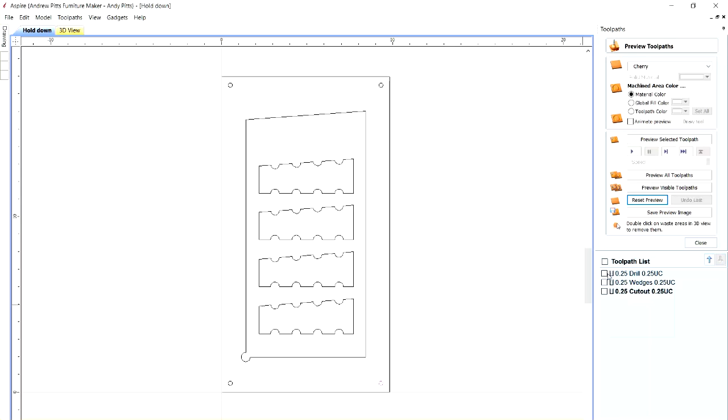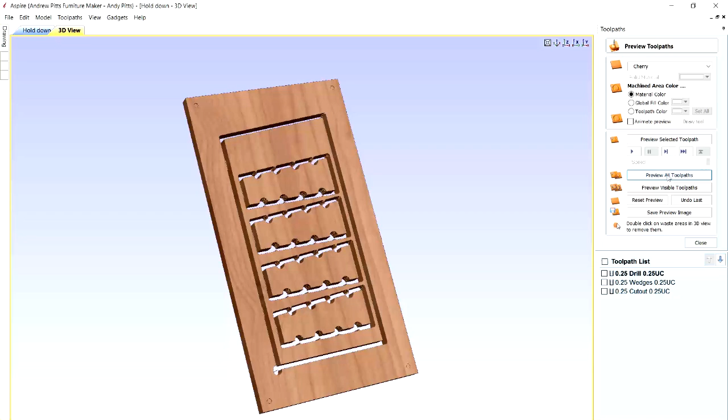So I made some little circles here for hold down screw locations and did a drill tool path for that. And you can just see the little dimples there. That's where I drill the holes for the hold downs. And then just did profile tool paths for the cutout and the wedges. And so if I come over here to the 3D view, we'll go ahead and preview all those, and bingo, there you are. You can see they're held in with little tabs. Just got to break those tabs, clean that up with a file or some sanding, and you got your form.

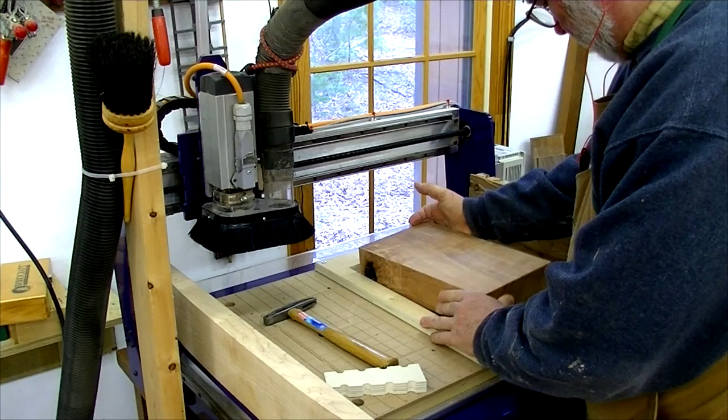Now let's get into how I made the model for the dish itself. I started out with a job size of 7 inches by 12. I found I needed to make it a little bit narrower than 7 inches because of my wedge jig, so it would fit in there nice and easy. 2.5 inches thick, so it's a pretty good block of wood. I used the lower left-hand corner for the XY datum position. And I'm using a very high modeling resolution to get the most detail I can.

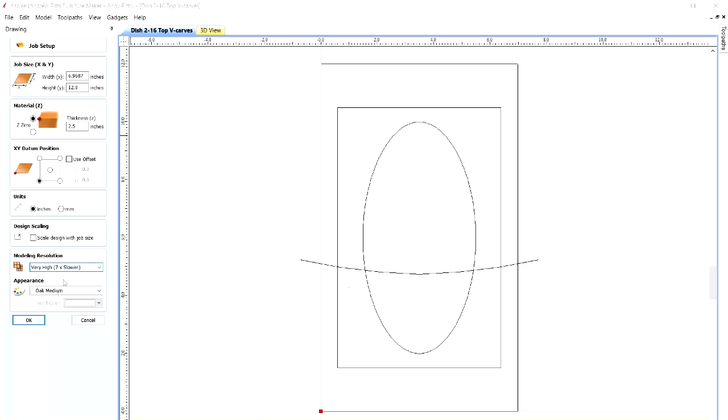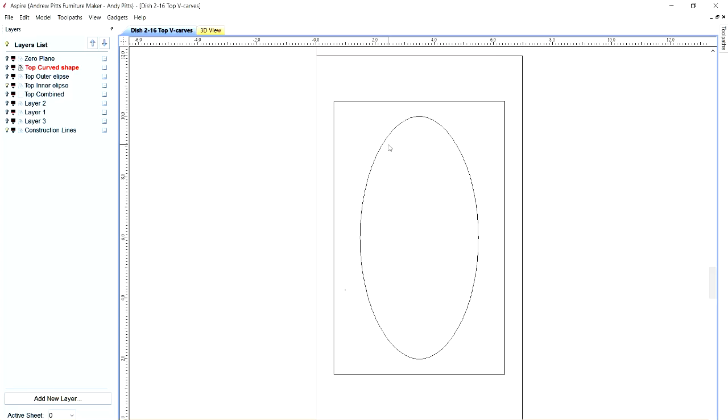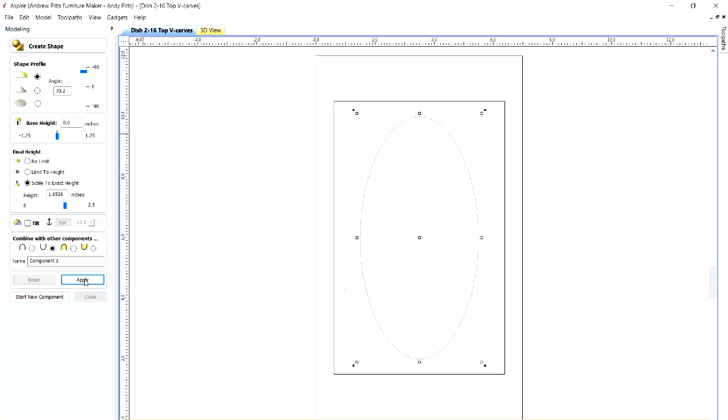I have to have an inner part of the dish that goes deep. And then I have to have outer vectors that show the little lip around the outside. And I drew that about the size I wanted. And then went into the modeling tab, selected that, and went up to my create shapes. I knew I'd want to subtract this shape from the piece, and I knew that the height would be somewhere around 1 5/8 inches or so, and a pretty steep angle on the side, and went ahead and hit apply and looked to see what I ended up with, and there you can see a shape like that. It's pretty much what we wanted.

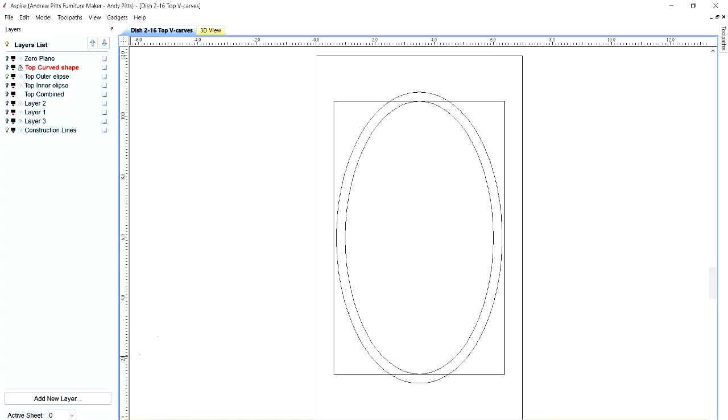I did the same thing, let's go back to layers here, with the outer ellipse, except that I made less of a shape height. Let me show you how that one ended up looking. I'll pick up the outer ellipse there. And if I look at the properties of the outer ellipse, click on the property thing. Oh, got to select it. There we go. And like I said, I've subtracted that. Its shape height was much less, just 1/4 of an inch, because it's a very shallow dish. Again, it's subtracted from the model.

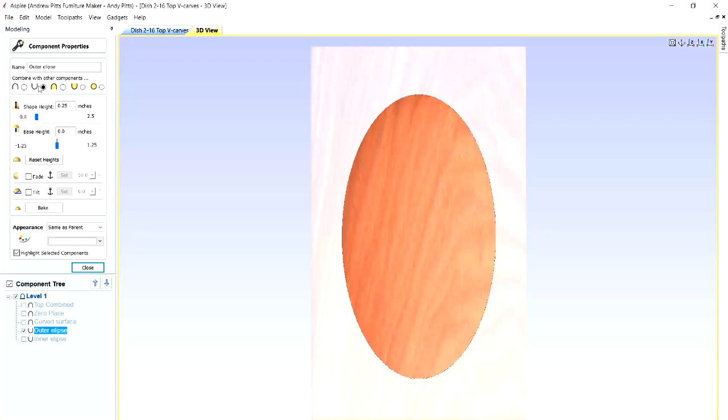So the inner ellipse first is made, and then the outer ellipse. They're both subtracted in order. You can see that this is a real flat shape, and in fact, I wanted a curve like

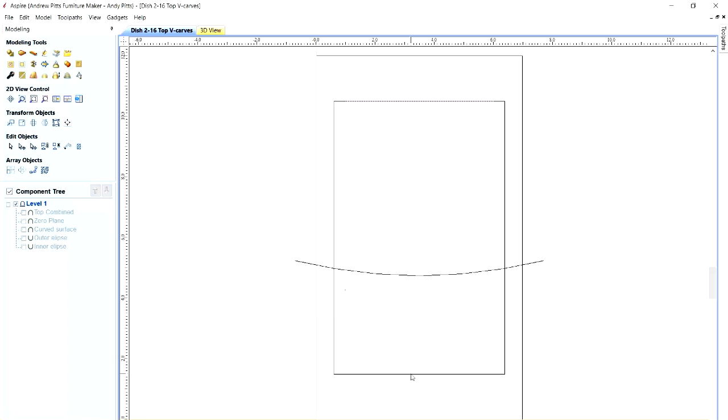this as well. Okay, so I was going to go ahead and make the curved surface here using that curvature vector. And all I did was a 2-rail sweep along a top and bottom rail. So it swept this away. And so I ended up finally with, first of all the inner ellipse, then the outer ellipse, which makes the lip, and then the curved surface, which makes that.

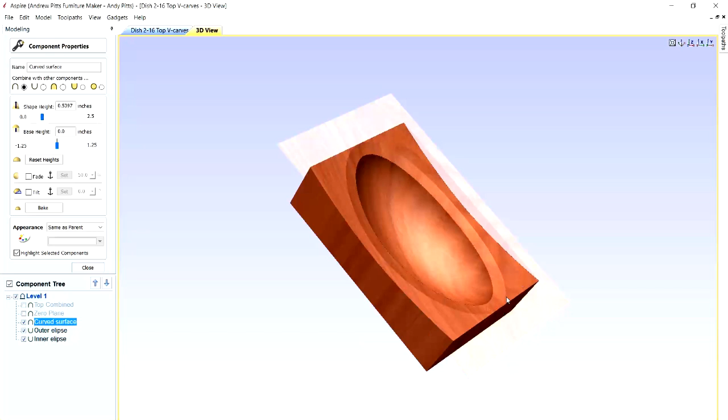So with my material being 2.5 inches thick, and this model, put my pointer in the center, almost 2.5 inches deep, that's going to be a little dicey, because that means I'll have less than 1/10 of an inch of material on the bottom of this. I'd kind of like to be a little thicker than that.

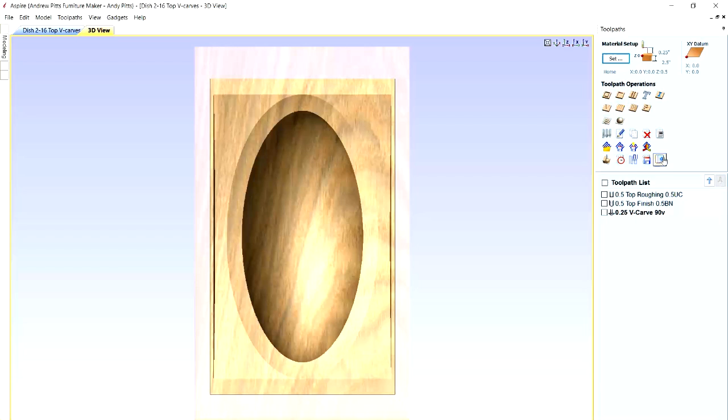So let's just go back to the modeling tab for a minute, and I'll show you a way to fix that. You just go ahead and check all of your active components, and go up here to this little icon that says Create Component from the Visible Model. And you end up with a component that is basically, think of it like baking all 4 of these together. It's not really a bake, because you still can go back to these individual part components and work with them, but it's one copy of the visible model.

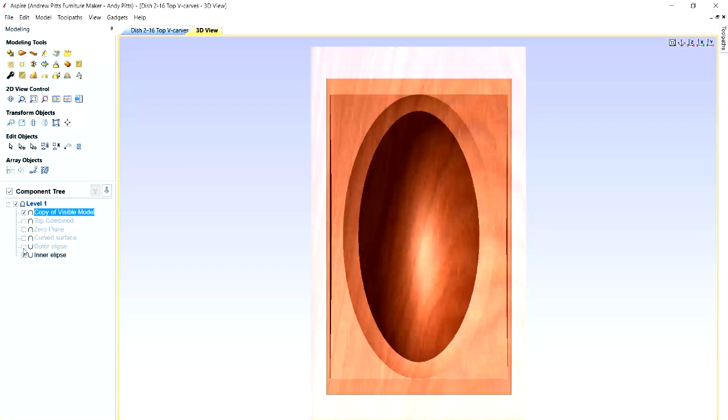And if I uncheck all these, so all I see is that, if I take that and go up here to its properties and adjust its shape height to something that I like better, like say 2.3 inches, which would give me the actual material thickness of 2/10 of an inch, that's not bad. That's almost 1/4 inch material thickness at the bottom. In other words, I'd be cutting down into this 2.5 inch thick block 2.3 inches max.

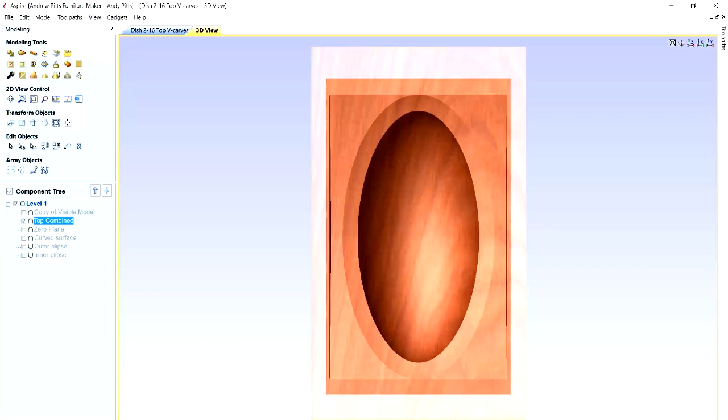So if I just go ahead and close that, from now on I'll just use this copy of visible model. So basically I have the shape for the top of this bowl made, and now all I got to think about is, how do I do all the little carving on the rim? We know that the outer ellipse and the inner ellipse are those vectors. So this is the area we want to carve in.

And so what I did was I made another ellipse that's about center line between these two that would be the guide vector for doing an array around following that vector, copying around following that vector. And all I got to do is make my shapes to copy. So I made some little triangle things. As a matter of fact, on one of these layers, I actually show these 2 little triangles. And there's my little center guideline that I'm going to follow around.

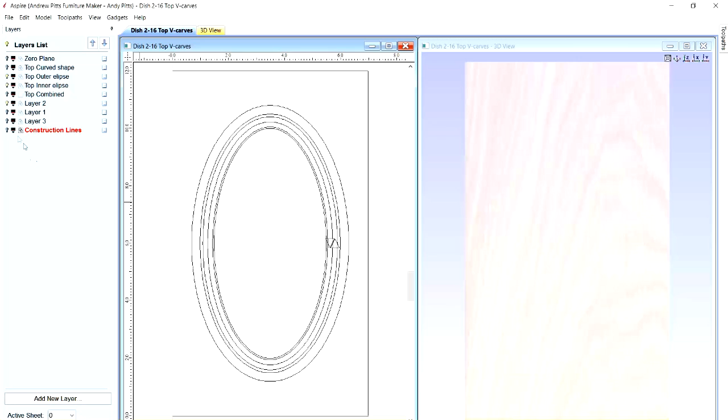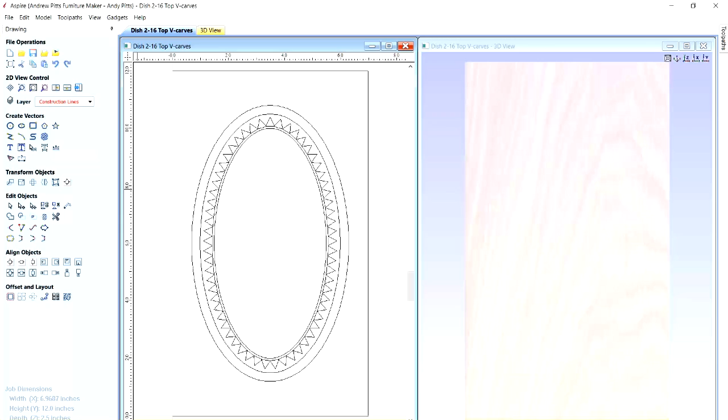And so I went ahead and took these triangles one at a time and just copied them around using the tool to copy object along vectors. You got to kind of play with this to get the spacing right like you want it, but you can copy that little triangle around your vector, and you can do the same thing with a complementary triangle. And now you get these little things that you can carve, just doing little V carvings in between those triangles.

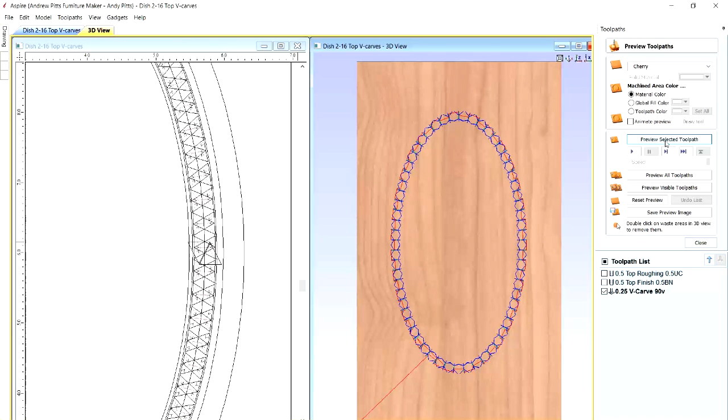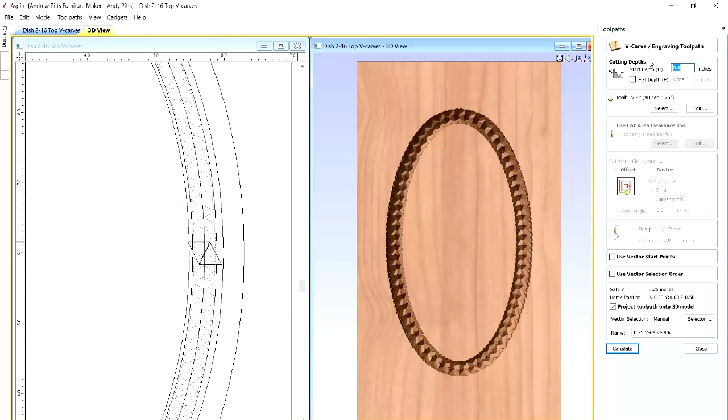If I just go ahead and show you what that looks like on the 2-dimension here, preview that toolpath, you can see those V-carves. Now, the trick is we want to get those V-carves down on the actual model. So the way we do that is to use a function called project toolpath onto 3D model when we make that V-carve toolpath.

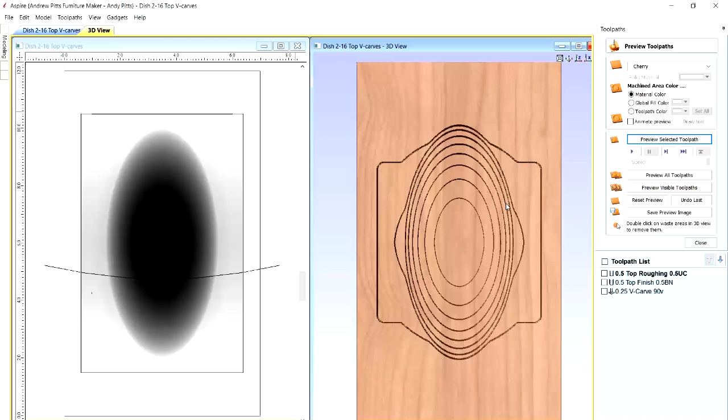And so, first of all, we made the model, and then I went ahead and cut the model and used a roughing toolpath with a 1/2 inch upcut bit. And then the next thing I wanted to do was the finishing toolpath. So let's take a look at that. Again, I cut to the model boundary. Now this time I'm going to use a 1/2 inch ball nose, and it's just going to raster back and forth at a 45-degree angle with a very small step over.

I think I used a 4% step over so that I'd get a pretty clean look, especially on these vertical walls right here, because when you're doing a vertical wall, it'd be that wall and that wall. If the tool's going like this, as it steps over just a little bit, it's stepping way down the wall, and you'll get a little ridge. That's why I had to use such a small step over, and even then you get a ridge that you gotta take out.

Okay, one of the things you do gotta think of though is I got a tool which maybe has a couple of inches of projection out of the collet, and maybe the actual cutting length of the cutter is maybe 1.25 inches, 1.5 inches, something like that, and I'm trying to go down 2.3 inches into this. So you really got to think about your strategy: how do you keep that tool from knocking the collet into the sides of the dish, and how do you keep it so it's not trying to cut along the shank where there's no actual cutter.

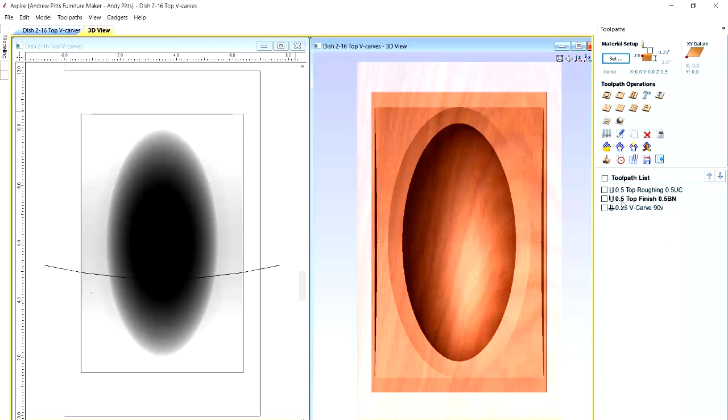So that's what my finishing toolpath looked like, and let's go ahead and take a look at that in the preview. Okay, there's finishing up the cuts. All right, at that point, then I can go ahead and figure out how I'm gonna project that chip carving there, that V carving, onto the 3D toolpath, and that's the deal. That's what it looks like.

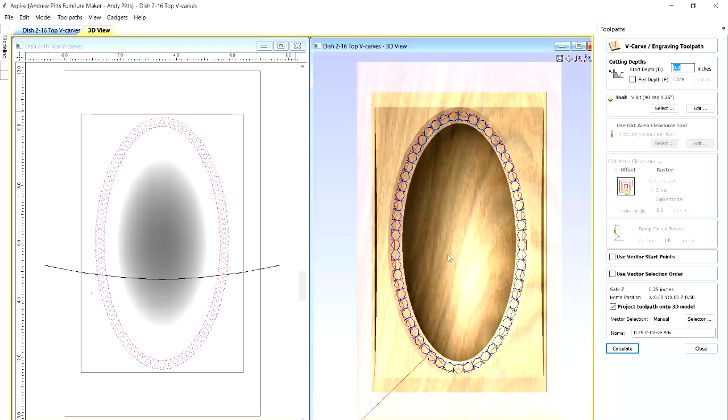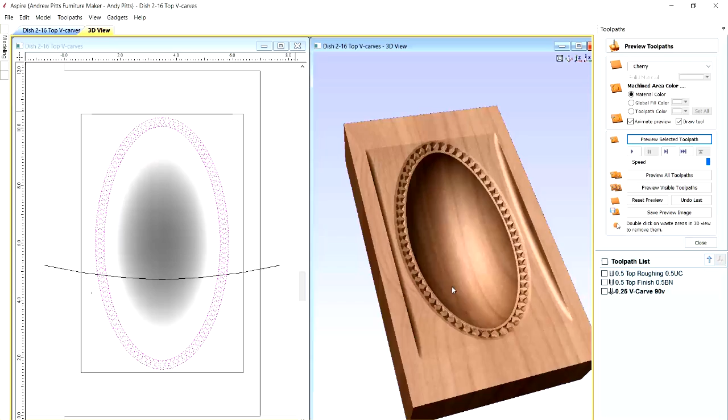Okay, you can see that it's actually put the tool down along that sweeping curve because I checked project toolpath onto 3D model, and that goes pretty fast. And so there you go. Now I've got the top part of the dish all done. So now I want to do the bottom of this thing. So I saved the file with a different name so that I could identify it as being the back.

And so now here's what we're going to do. We're going to click on the combined file, and we see our dish there. I know you can't see the bottom of your screen, it gets cut off, but my cursor is right in the middle, and I'm showing about negative 2.3 inches on the little counter at the bottom of my screen. All right, so what I want to do is make a 3/16 or so thick bottom on this thing.

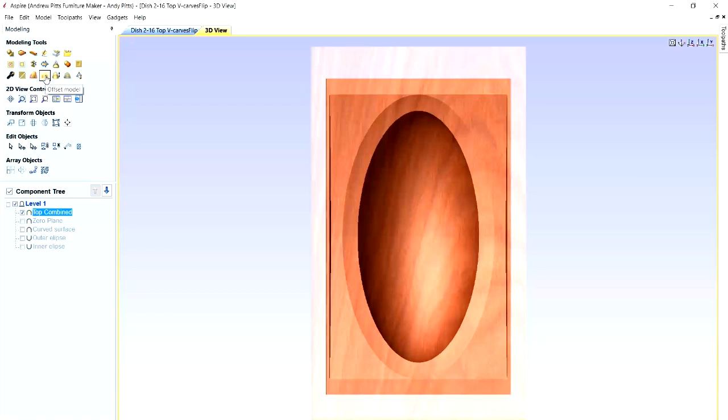So I'm going to go up to the modeling tools, the offset model button, and I'm going to offset this model by negative 0.1875, which shoves this thing down 3/16 of an inch. And if I preview that, okay, it gets shoved down. So if I just accept that for a moment, uncheck the top combined. So now all I have is this model that I just made, which is an offset version. And now when I put my pointer in the center, it's down at negative 2.5 inches. So I've essentially moved that model down into the wood until it's at the very bottom of the actual 2.5 inch thick piece of wood.

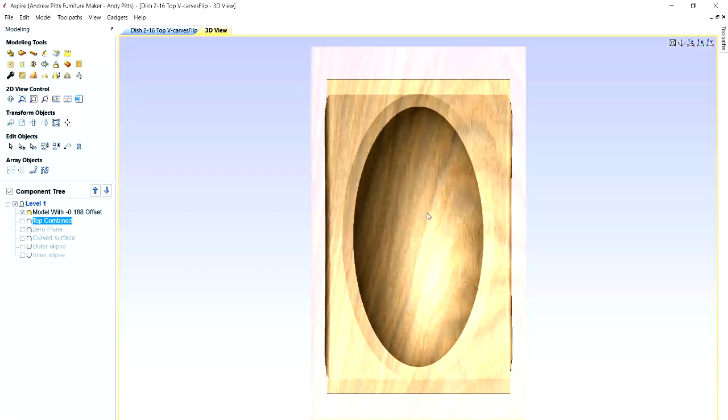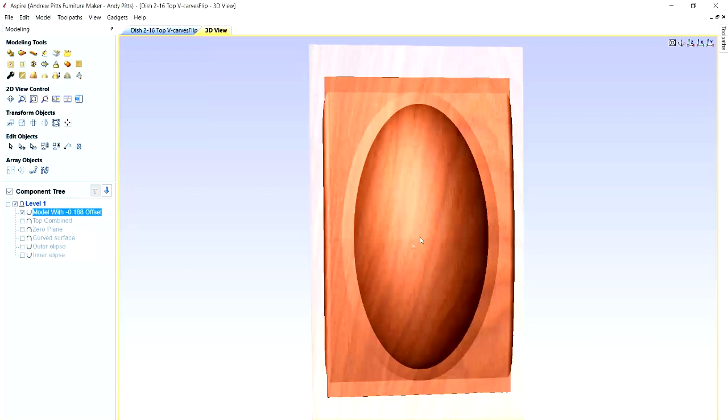Now right now this automatically came in with a combine mode of merge, and you notice that I basically have a dish, and that's not what I want. I want something that I can carve that looks like what this would look like upside down. So if I right click on that component, go to combine mode, subtract, it reverses this. And now I have what I would see if I was looking at the bottom of the dish. So now I can work with this thing.

Except I got a little problem here that there's nowhere for this to sit. It's going to be kind of rolling around the table. So what I'm going to do is make a little hat for that.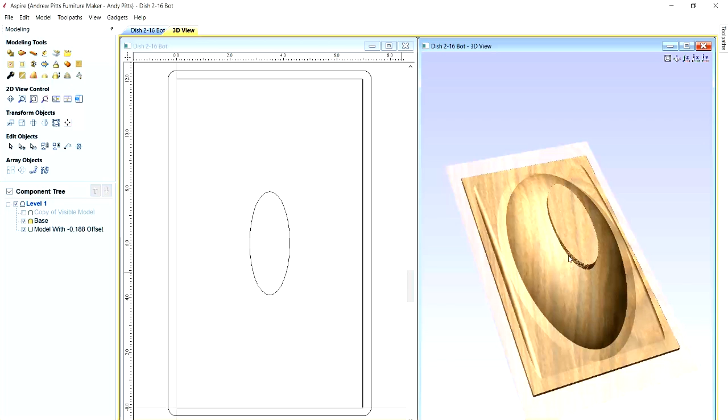Okay, so you got this offset thing down, but I need to make a little hat for that base. All right, so what I did was I made a little vector here. Okay, and I simply made a shape, basically made a real sharp shape, so a little top hat, and simply merge that in with the offset model. And when I go ahead and cut all this, I've got what I need.

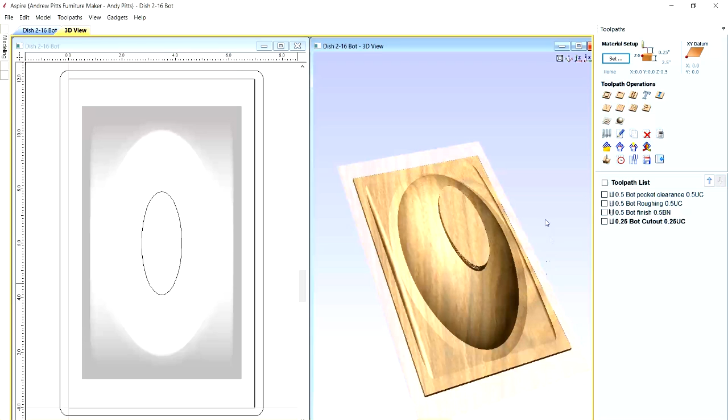So if I go back over to my toolpath side, using the same kind of bits, first thing I got to think about is, hey, I'm going to send this 1/2 inch diameter bit way the heck down here, and it's going to go down 2 inches or more into the wood, and I'm probably going to be running my collet right up against some extra wood. So the first thing I need to do is figure out how to get rid of a whole bunch of wood. And so what I did was I simply made a big file called bottom pocket clearance.

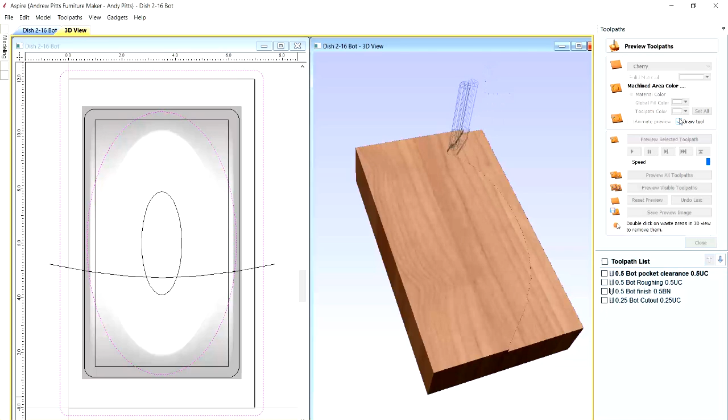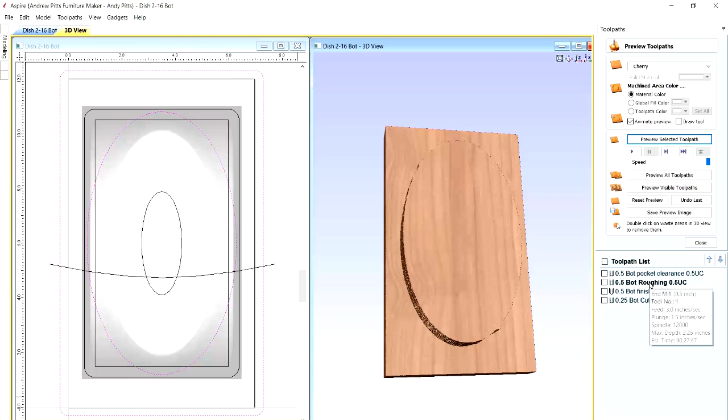I'll preview that toolpath. We get rid of the draw tool here, so go a little faster. Until I have basically the upside down bowl, but I don't have to worry about running my collet into this extra material out here. Alright, so once I have that bottom clearance done, I can move immediately into a bottom roughing using the same exact tool. I went ahead and did a finishing toolpath on that same model using the 1/2 inch ball nose.

Finally, I can just do a cutout. Now this cutout, got to think about this for a second. Do I want this cutout to go all the way through the material, or do I want to let it save a little material at each end to act as tabs? If you cut all the way through the material, all of a sudden this dish has gone wild. But I found it easier just to not cut all the way through, so these two ends act as tabs.

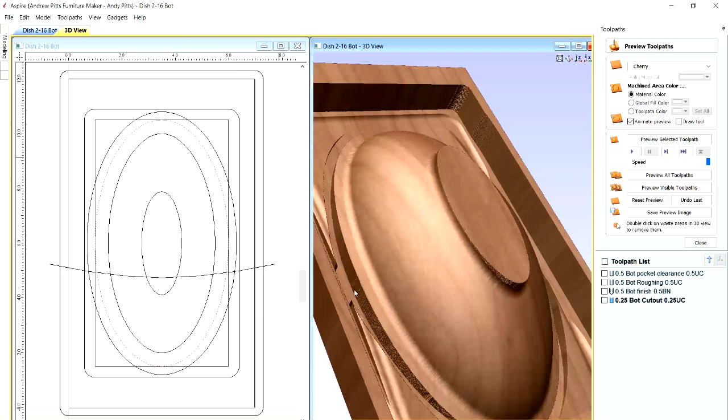So let's go ahead and take a look at that toolpath. Alright, now I'm cutting through there. I've cut down here. Now imagine I've already cut the inside, the other side of this blank. So in reality, I'm seeing daylight along here. I'm seeing daylight all the way up till around here somewhere. So that's it. That's how you do this two-sided cutting and get the model. So now let's go ahead and move into the actual working with the ShopBot.

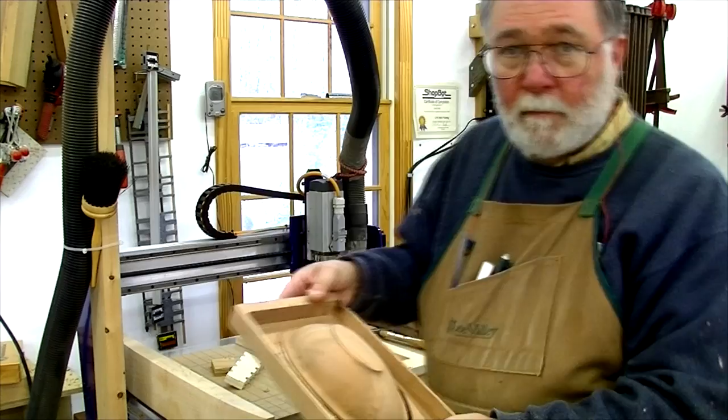And here's the finished bowl. Well, it's not really finished, but we finished with the cutting. You can see I've got to cut around here now to cut her out and then do some sanding, but essentially it turned out fairly nice.

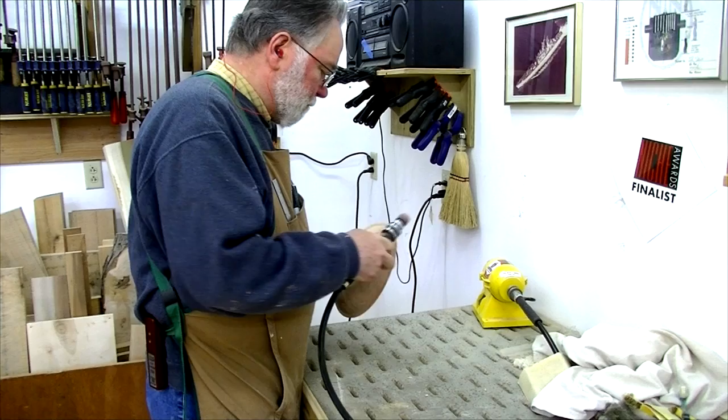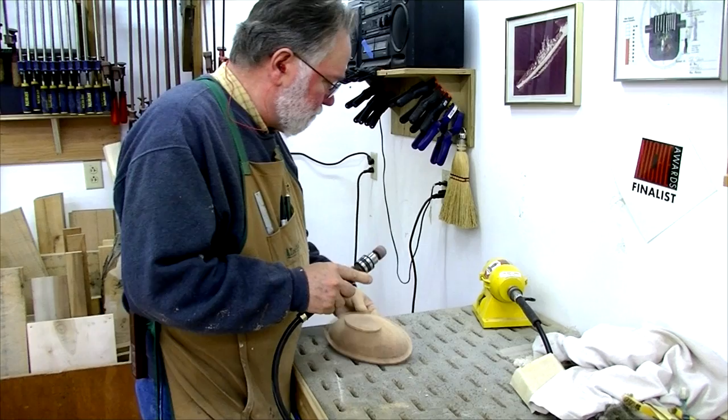So I hope this video was very informative about how I went about doing this. And you know, it's an iterative process. After making these first ones, I've thought of some ways to improve the file, and I'm constantly changing my toolpaths to reap some better results and some better efficiencies and so forth. But on the finished piece, I went ahead and after sanding it, I coated it with some semi-gloss lacquer. Makes a nice sheen. It's easy to apply, and it gets into these small carvings.

And then I've tried doing this by laminating materials. This is actually a laminate of two slices of walnut laminated horizontally. In this one, I tried a little vertical lamination, vertical slices, just to use up some scrap material, because this really is a 2.5-inch thick blank that you have to start with, which is pretty sizable. And so you can play around with things.

In this particular version, I used the V-bit to make little S-shaped grooves all the way around. I'll get in close so you can see that. Hope you can see that. Whereas in the original, I did some kind of a chip carving effect. So there's all kinds of things you can do to get this. Another thing I tried was using material a little bit thinner than 2.5 inches, and the result was I got a very thin-sided dish, which is very nice. So, hey, the sky's the limit with this stuff.